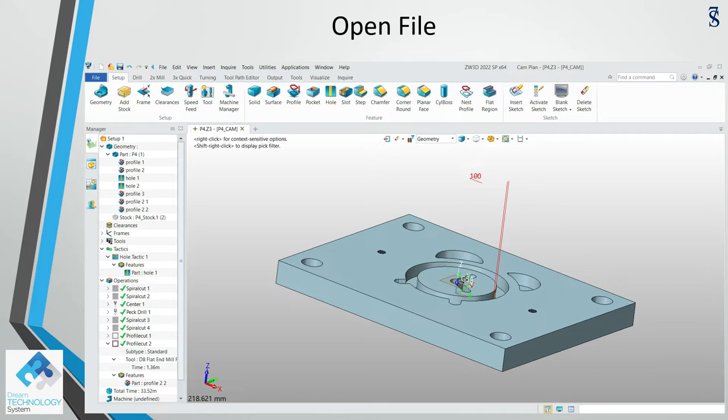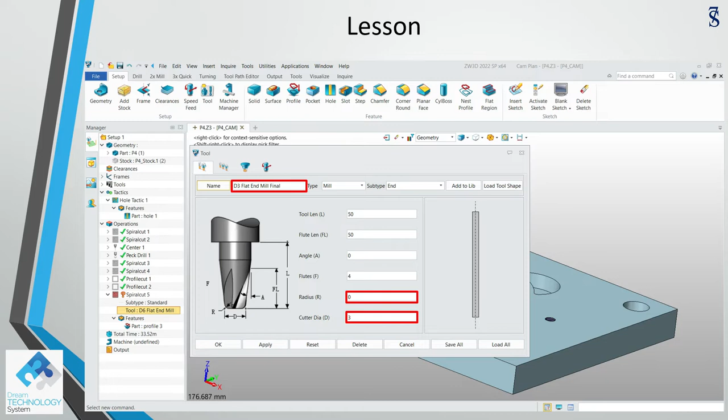First we will duplicate the operation, operation number 3, spiral cut 3. Manage - we want to change the tool from diameter 6 to diameter 3 because the area has a radius of R2. We will use 1.5 radius, which is diameter 3. Manage, change to diameter 3. Flat end mill, final, tool number 8. Click OK. With that, we go into the parameter setting.

Right mouse click, edit. Change RPM and feed rate. We will set the bottom and the wall to 0 to do a finishing cut, base only. Retract, set 2 and 2. Change the color, then go for calculate.

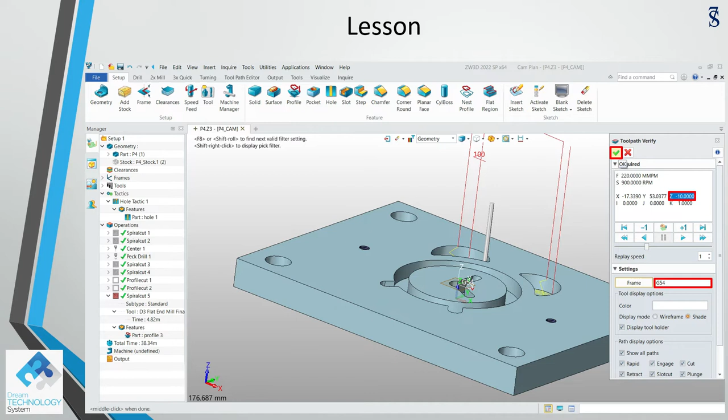Yes, looking good. Let us verify whether it's what we want. Change the frame to G54. Drag the 2, yes, Z-10 to the depth. Click OK, click OK again. We will go for the solid verify. We perform visual analysis - looks good. Okay, let us save the file.

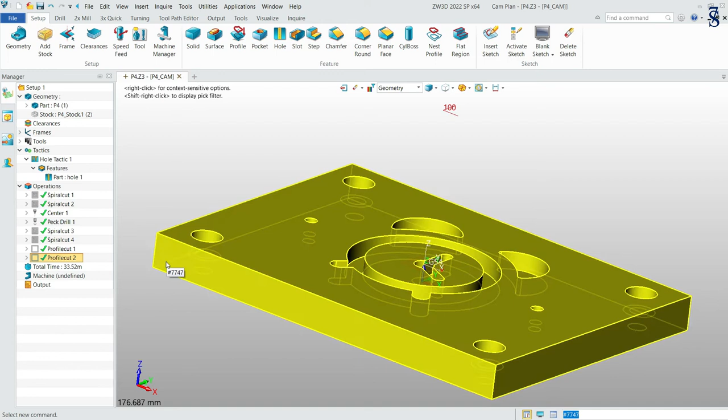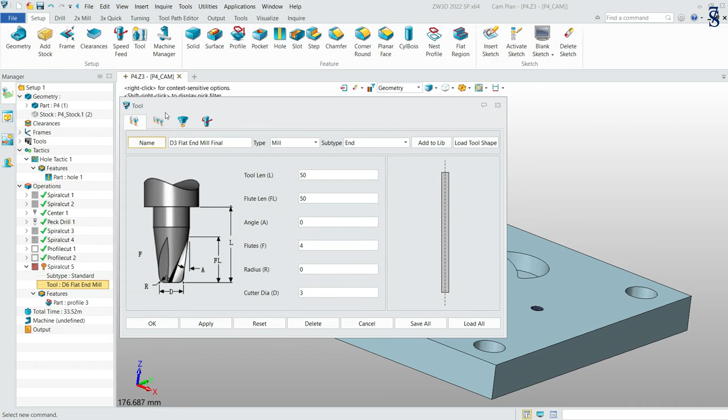First, we double click the previous operation, collapse it. We don't need the part detail as well, we can collapse it. Right mouse click, duplicate. Change the tool, manage - we're going to put a diameter 3, D3, flat end mill, final, 0, this is 3. We go for tool number 8. Click OK. Yes, we're going to use this tool.

Edit parameters. RPM 900, feed rate 220. No change here - this is set to 0 and base only. Change this one - 2 and 2. Display - we want to change the color to yellow.

Let us calculate - looks good. Yes, go for verify. Set the frame, drag the 2. Yep, is Z-10. Okay, let us click OK. Go for the solid verify, slow down, play.

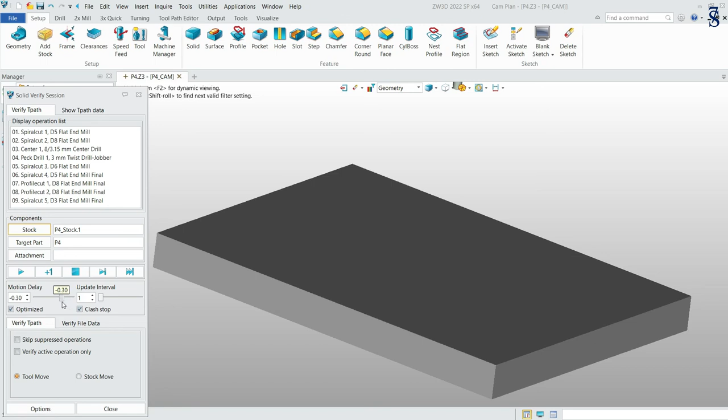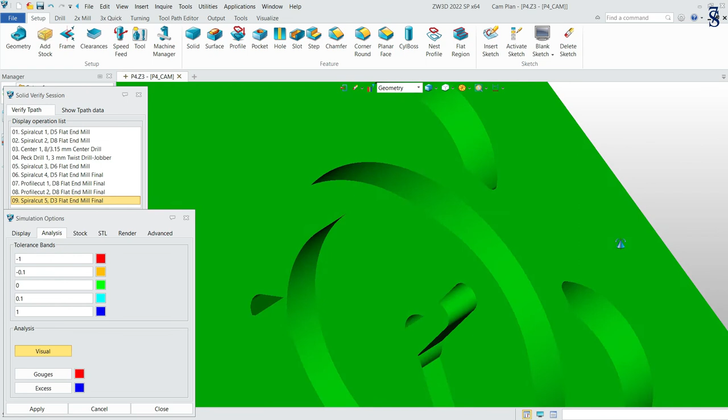Finishing cut. Looks good. Go for the visual analysis. Zoom in, look for the bell area. Yes, all green color to the size that we want it to be. Close, close. We save the file.